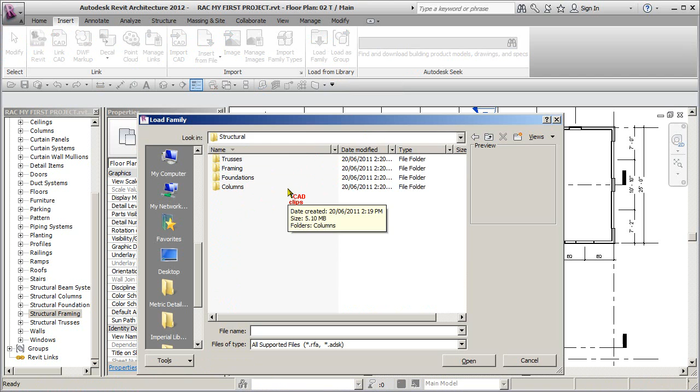So we go to our Insert tab and say Load Family. Search, sort by alphabetical, invert that, double click on structural, then framing, then wood, and we want a glulam western species, I suppose. Looks good, and I think that's the only one.

It's going to ask us for some sizes. This is a type library, a TXT file that accompanies the family, and it's really easy to make these on your own. When you have lots of different types, instead of loading all of them, you can hand pick them, and it's extremely easy to create your own table externally.

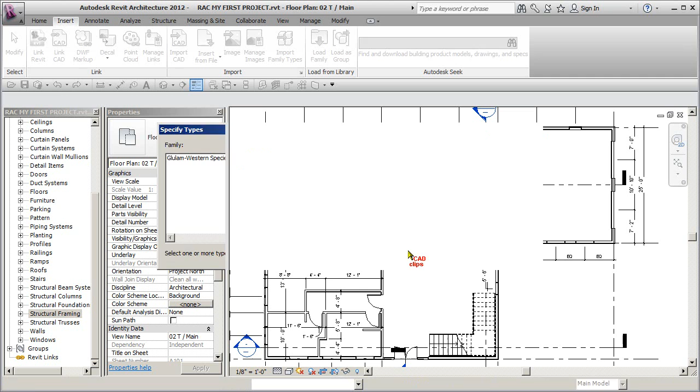We want something that's going to be a flush beam, so we don't care about the width—the engineer is going to size that. Let's go with a 5.125 by 13.5, because that will get tucked up in there. Okay, that works good, hit OK. So now that beam is loaded under structural framing, and we have it inside of there.

Okay, what else do we need? We need some columns. So let's go Load Family, back to structural, columns, wood, glulam western species again.

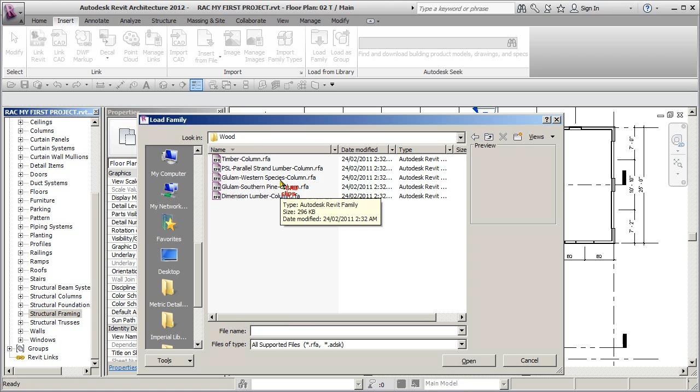Our walls, the core of our walls are 4 inches, so we can't go more than 4. What do we have there? We have a 3.125 by 27. Hit OK, and if we needed a bigger column, we could have also changed the size of these walls. So now under columns we have a new column, and you can pick or size whatever you want, framing wise.

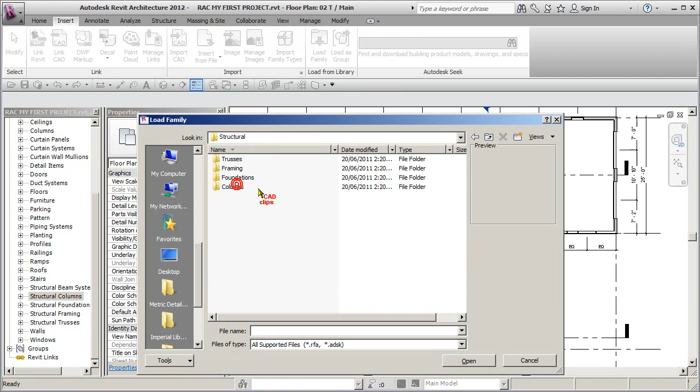Those are good, and we're also going to need some concrete columns for the piers underneath, so we might as well do that as well. Load Family, structural, columns, concrete square. Hit OK, and that one comes in with a 12 by 12, 18, 24, and 30, and you can create your own as well. That's all I need for now, so I'm going to say OK.

So now I'm going to go to my structural tab and draw a beam. I'm going to pick here—there it is, my 5.125 by 13.5. Looks good. Now, where is it going to go? Well, I'm drawing it here.

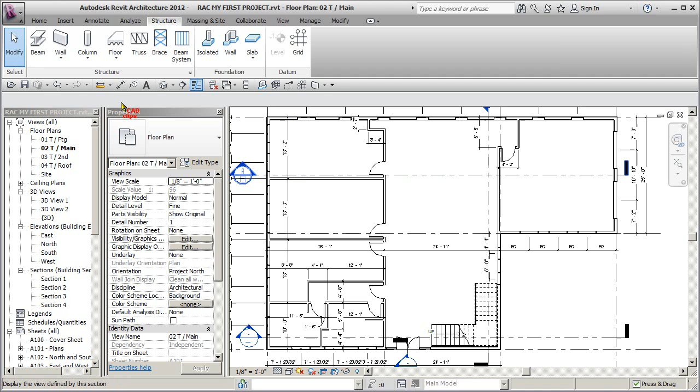I'm on the main floor, so by default it's going to place it on the main floor. Okay, it says click in here, let's try that again. Beam. As I draw it, it says top of second floor—I think because I might have been playing around with it beforehand.

So the fact is, what we need it to do is be top of second floor minus 3/4 of an inch. Okay, let's hit escape and stop this for a second.

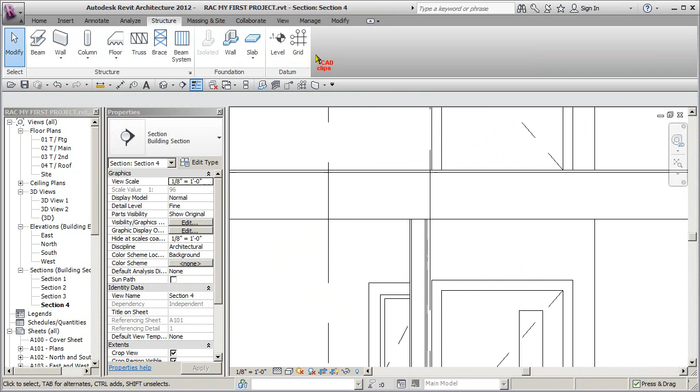Let's go have a look at our cross section here. We're about to draw a flush beam right inside of here. There's our top of second floor, and there's where our beam's going to go, right inside this space. And then we're going to have another one over here, on top of this one, and that must be going through a door—yeah, we're seeing some framing. So there's the two beams we're about to draw.

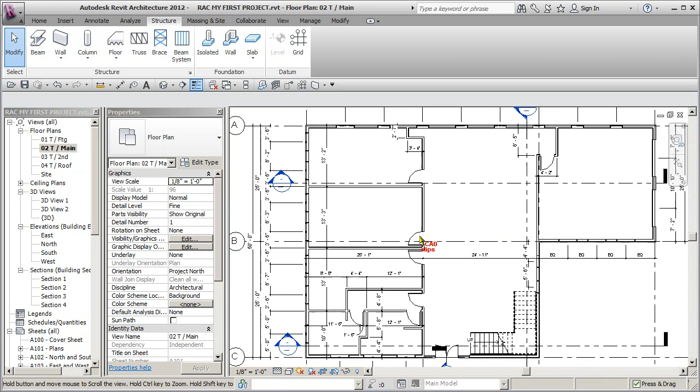It's easiest to draw it from the main floor, but it's not going to be on the main floor—it's going to be above it. So here we go: beam, pick your type, and then say no, it's not top of main, it's top of second. You can't set an elevation—the extension here is a lateral extension, not a vertical one. So I'm not sure why, but you cannot set the offset until after the fact.

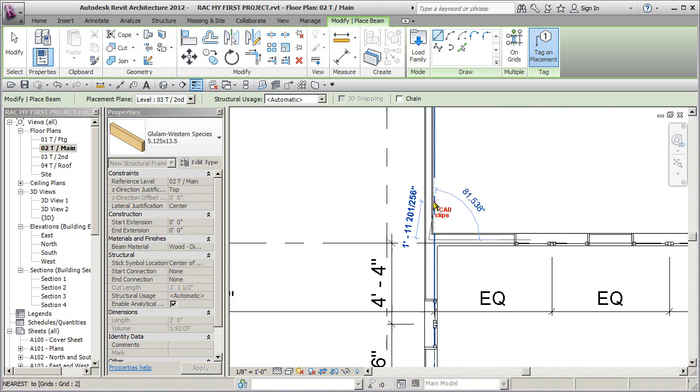Watch what we're going to do. We'll say okay, it's going to go up above me, so I'll get a warning saying I can't see what I've just drawn. I want to pick right down the center of this wall, and we'll need a header over this window. Click—there's my beam. None of the created elements are visible in this view. That's fine, hit escape, escape.

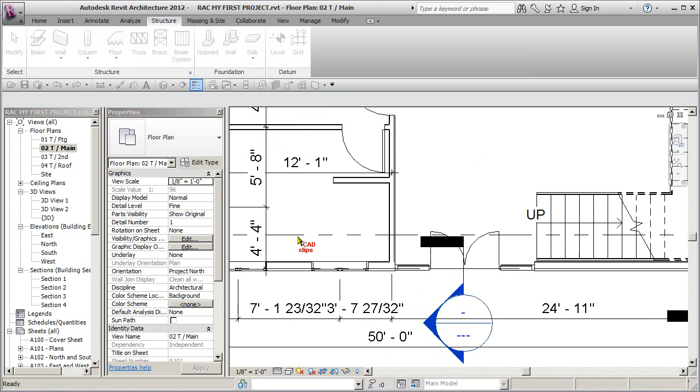We can ignore that warning, and we're going to do it again. Zoom in over here, go beam, save project, sure. I'm going to pick my beam type, set it up at the second floor level, hover in here, snap to the center of that wall, zoom out, nice and straight. I'm going to need another header above that window—same warning, who cares. Escape, escape.

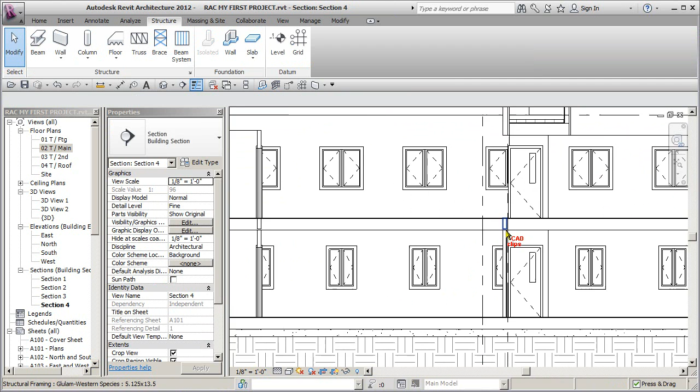Now I double click on my section and zoom in, and there's the beam I just drew. That beam's okay, but the problem is I need to set this—see this offset? Minus 0.75, actually yes, minus 0.75 inches.

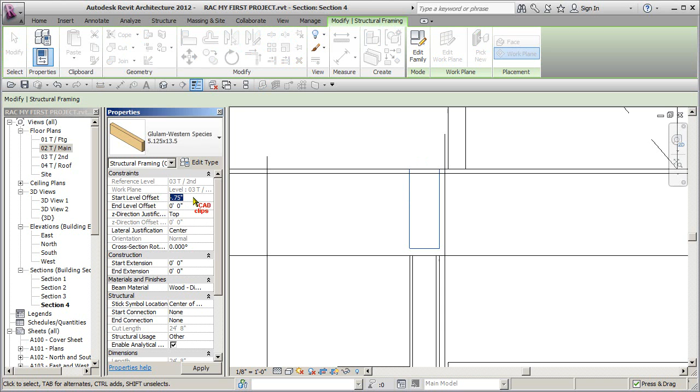I'm going to go Control C, because you can slope it by offsetting either end. So Control C and then Control V. Boom—now that beam is down inside of there. I've got my thin lines on; if I do TL, you'll see thick lines there.

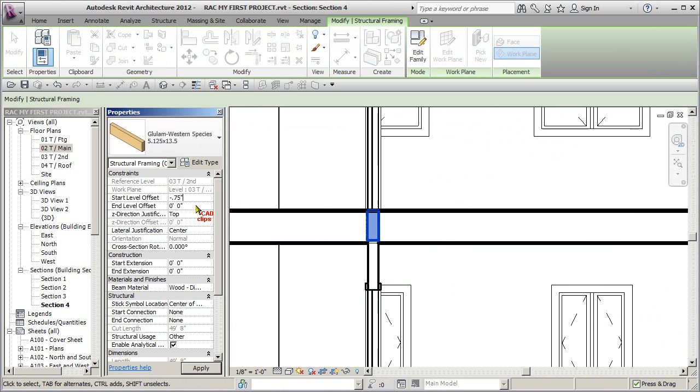So there's my beam there, and this one's the same thing. Going into here and changing this—Control V minus 0.75, Control V minus 0.75—and my beam moves down. Okay, there's my two beams.

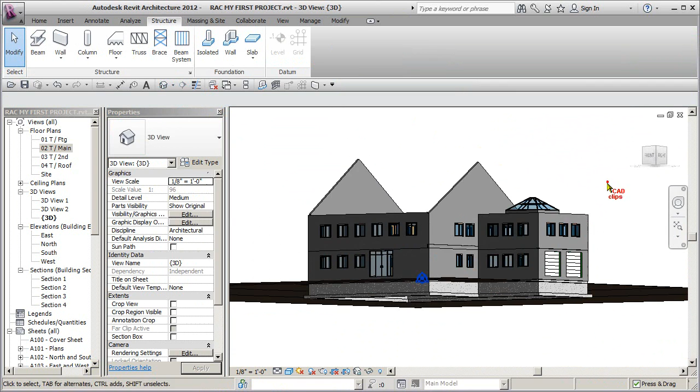Let's go have a look at that in 3D. Shift middle mouse button, grab this, hide it, hide the element. Let's hide all this stuff—we're learning here, let's hide the elements. And click on here, and in fact if I just click on it, my floor goes transparent, and there's my beam.

Now we're going to add in some posts, and we'll put another beam underneath. That's it for now.